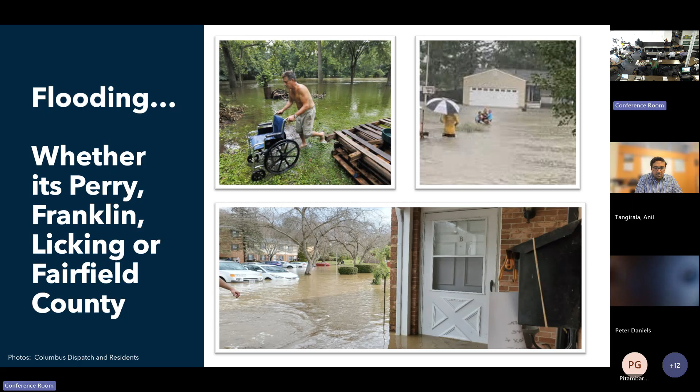So whether it's Perry County, Franklin County, Licking County, Fairfield County, we all have flooding concerns. And this is just some pictures. The top left is actually Granville. And this flood event happened down here on State Route 79 in Licking County. It was a pretty significant event, but this type of flooding seems to be becoming more common.

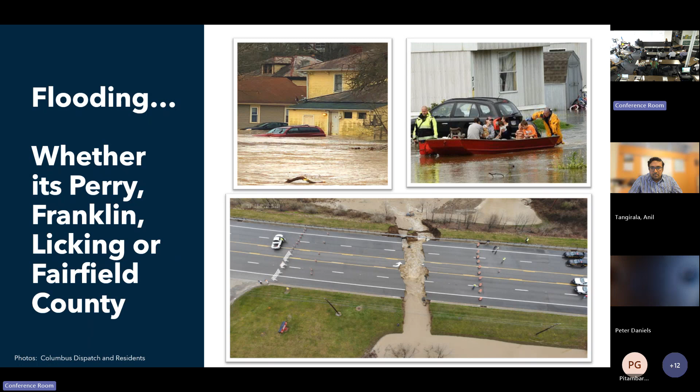I have always talked about the floodplains that we have in Ohio as being bathtubs, and I just never was able to describe it. So I said, I'm going to draw a picture of it just to get the point across. And what I mean by that is we don't have rapid moving water when we do flood. It usually fills in, and then if we have filled in the floodplain, that water goes elsewhere. So this is the intent of this graphic, to show that flat floodplains maybe don't drain as fast. And we have that issue here in the state of Ohio, in most of our counties, especially in central Ohio.

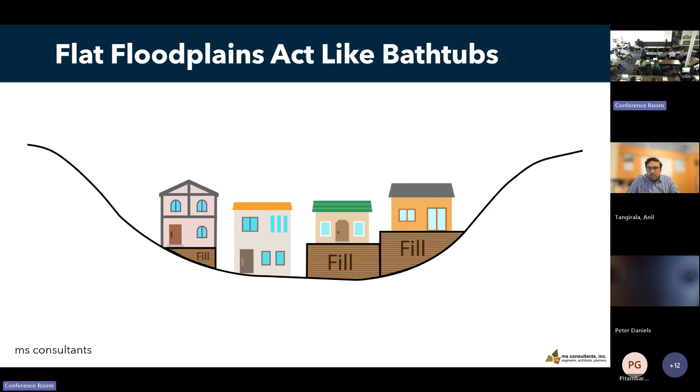One of the other things that really was telling to me is, we always talk about the 100-year event, the 100-year floodplain. That's the statistical analysis that we use when we say, boy, we had a pretty significant event. But this is pretty significant information. We have had four 1,000-year events in the last decade. Four in the state of Ohio. So that is telling to me that we are having microbursts and other things going on with our climate and our environment. And how do we address that?

Because the NFIP that we currently have was really used, and to this day is still used, for insurance. If you live in a special flood hazard area, that's what that NFIP map and those NFIP regulations are for. It did nothing to look at the 500-year event, the 1,000-year event. All these events are becoming more and more dramatic.

So the benefits to upgrading your standards: most communities in central Ohio, and I did an analysis through ChatGPT, have minimum standards and maybe some additional advanced standards. And why I am talking about the standards is because it's the low-hanging fruit of trying to provide resiliency for our watersheds. It's an easy way to do it. It helps to protect what's currently there and also future development. One of the things I also like to say is, I am not anti-development. I'm pro-development, but let's do it in a resilient, responsible way. That's really the end all be all.

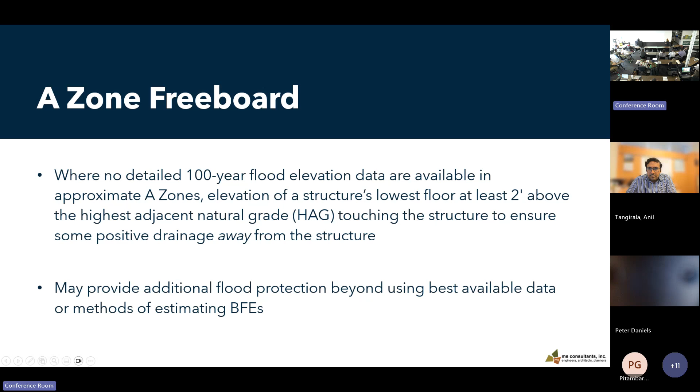Not working again. Battery. Try. Hit the next slide, please. The screen first. It was going so well.

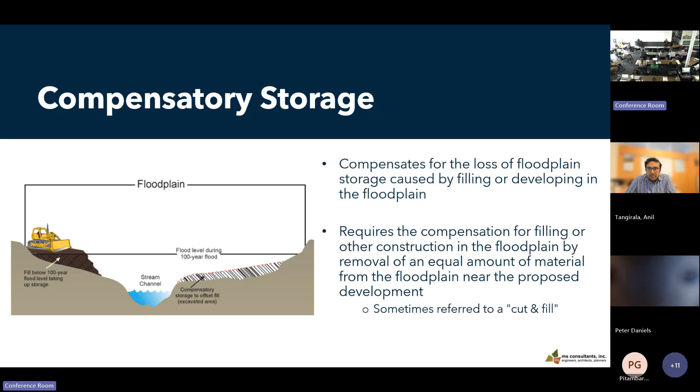It requires you to do all kinds of things, but what is compensatory storage not? And I finally made a graphic to show, I'm a big fan of these graphics here. Probably not proper terminology or English, but what is it not? It is not putting compensatory storage below the high water mark. That's basically the melon baller approach, and I don't understand why development thinks that that is compensatory storage. Just think about it in your mind. When that floodplain fills up, is that helping at all to compensate for the loss of you filling in the floodplain?

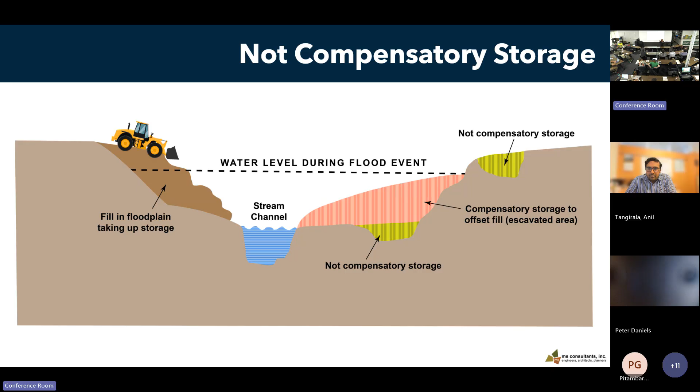The other thing compensatory storage is not, is outside of the 100-year floodplain. If there's no hydraulic connection, it is not compensatory storage. I feel like this needs to be plastered when people say, oh, we'll just go ahead and do compensatory storage. I'm like, okay, this is what it's not. So don't submit your plans and say this is what you want to do. So I'm glad that we finally were able to create this graphic.

Freeboard. This is a very common advanced standard that a lot of communities adopt because it's easy to do. It's basically a safety factor. The irony is when we're having these 1,000-year events, if you're in a 100-year floodplain, chances are you're still going to get flooded. But freeboard does help. It compensates for unknown factors that could contribute to flood heights. And it really seems to be the simplest advanced standard that you can adopt.

And I got some interesting pictures later to explain, because a lot of people have this vision that it's going to look like a house on the East Coast that's on stilts. And that is not what I'm talking about. So I finally took some real pictures to say, this is freeboard. It's not 10 feet in the air, waving in the wind, and you're having wave action issues from the Atlantic Ocean.

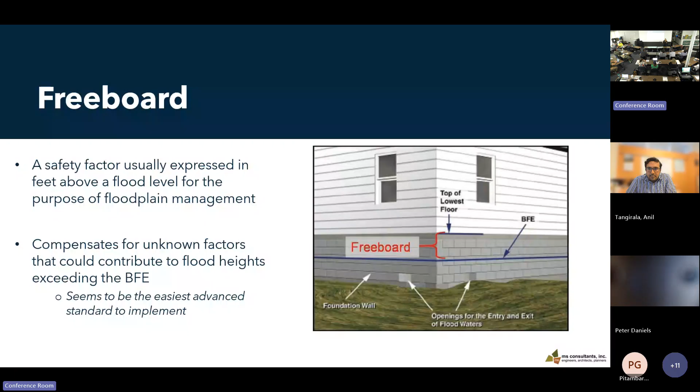Setbacks, this is great. And actually a big nod to the Chagrin River Watershed Partners. If you ever want to go to a website and see a great location for all kinds of different advanced standards, the Chagrin River Watershed Partners have done it. This is my favorite one though, because it provides a limited use or development setback along a water course. So yes, they have flood regulations, but they're also saying, listen, that's not enough. We want to have the setback consideration, because what do we know about streams and rivers? They move, they change. And so that setback helps to guarantee that you're a certain distance away from the center of that stream or that living waterway.

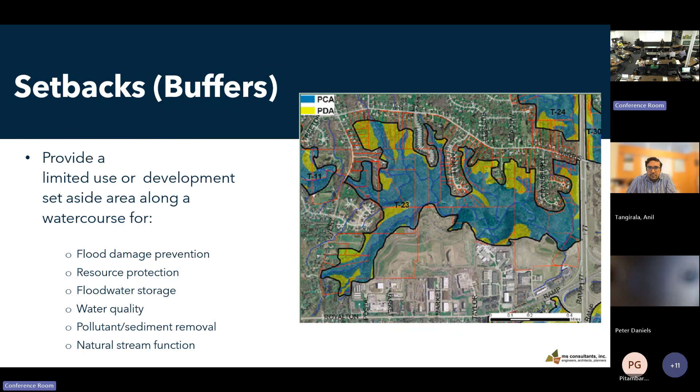Use restrictions. Restricting or prohibiting use of floodplain, which is dangerous to health, safety, property. This kind of goes in line with the no fill, and I'm going to talk a little bit more about that in detail. This is my arch nemesis. I do not comprehend why people want to fill in the floodplain. It doesn't make sense to me. It never has. I'm usually deer in the headlights when a person says this is their idea, that it's going to make sense.

First of all, if you fill in the floodplain in your residential structure, you're basically creating an island. So great, you're in a house and now your house is protected, but how are you going to get out? How are emergency vehicles going to protect you or come for you? So I wish this wasn't even something that I have to talk about, but I do, because one of the most common things that we do in our floodplains is we fill it. And then the developers walk away, and then everyone is stuck with the fill situation.

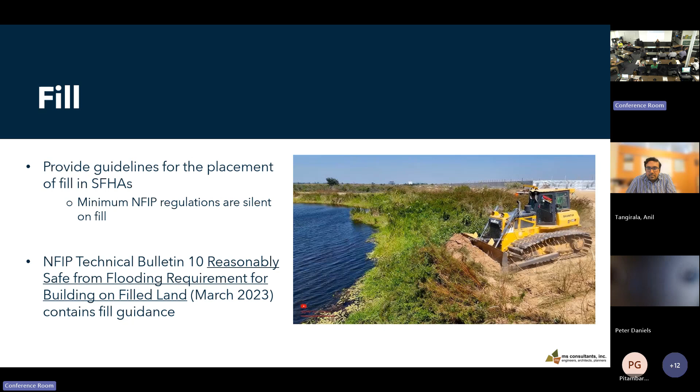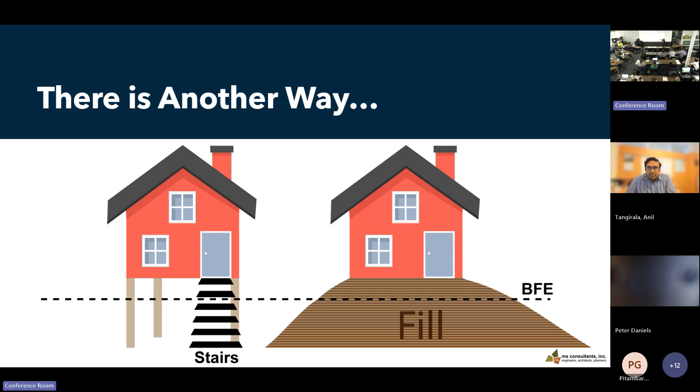So the NFIP regulations don't address fill. They say be above the BFE, be above the base flood elevation, however you do it, whether it's fill or whatever. But this is the easiest route for developers and anyone who wants to fill in the floodplain. So there is another way. Yes, there is. And this is a terrible graphic, but at least it gets the point across, and I have some real pictures, but this is what we traditionally do on structured fill. And then this is what I'm proposing, but not that high. It's terrible, I know, but this is where I'm going with this.

And I've worked with a structural engineer to try to get some numbers too, because that's the other thing. Well, we just can't do it. Too expensive, too much more expensive. And so looking at structured fill versus elevation, it's really, at this stage of the game, almost a wash.

Make sure your clickers work. Okay, so one of the places that we work is over in Fairfield County, near Buckeye Lake. Popular place for recreation and boating and flooding. A lot of floodplain around Buckeye Lake. It used to be called Pigeon Roost Swamp. It was famous because it held a lot of water. So it seems to be the place du jour where people want to go build new houses. And so one of the things that we're dealing with is this low-lying swampy floodplain.

When you put in fill, where does that water go? It moves to another location within the floodplain. And people who've been there for 20 or 30 years are like, now I'm flooded. I've never flooded before. What's going on? Well, the watershed has changed because new fill has been placed. So we went through this exercise with them to explain to them and the development community, you can do it. There's another way. And in fact, there was an example that just went in the prior year. And so we showed this to them.

And this is an example of an elevated home in North Walnut Township, built in a 100-year floodplain. And they use something called Perma-Columns. That's kind of like Kleenex, right? That's just a brand of it. But basically, this elevates the structure and you can't even tell that it's an elevated structure. It's protected. The only thing this resident has to do now is make sure their car is out of the way when the flood comes.

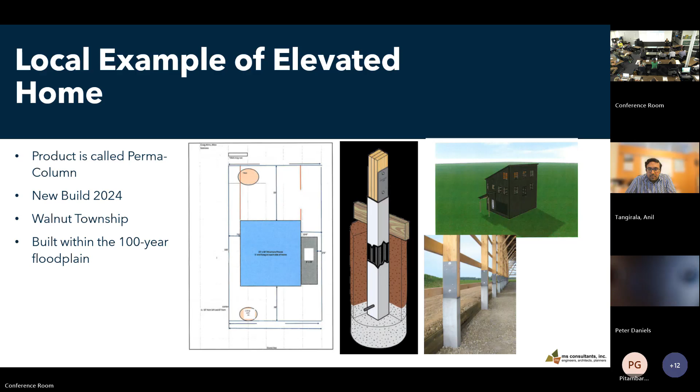Okay, here we go. This is the Central Ohio comparison of flood regulations. So, as I said, I used AI and did a little bit of analysis because one of the things I keep on hearing is, oh, Central Ohio has such strict regulations when it comes to the NFIP, and it's hard to develop here, and that's not the case.

I mean, we may have some communities whose processes need to be fixed, maybe a more structured way of looking at development. But at the end of the day, the NFIP, the regulations that we are using to protect our floodplains and our watersheds are not that advanced. But here's a comparison. Like I said, this is for everybody. I'm going to give this to everybody who wants it.

Licking County, Fairfield, Perry, and Franklin County. And as you can see the comparison, most of them have a freeboard, which I was really surprised about. I was like, oh, well, okay, even Perry County, which is probably one of the most rural of this comparison, has a freeboard requirement. And the only other thing that Licking County has that is a little bit more advanced, first of all, they're a CRS community currently.

CRS is Community Rating System, which is a FEMA program that allows you to do more advanced standards and gets people discounts on insurance. And they have a 30% discount across the board for residents in Licking County. That's a significant savings for folks who live in the floodplain. And the other thing that they have is, I don't know who made this decision, but it's pretty awesome. Back in the day, they're one of a couple communities in the entire nation that looked at advanced development within their floodplain. So they looked at future conditions as part of their mapping.

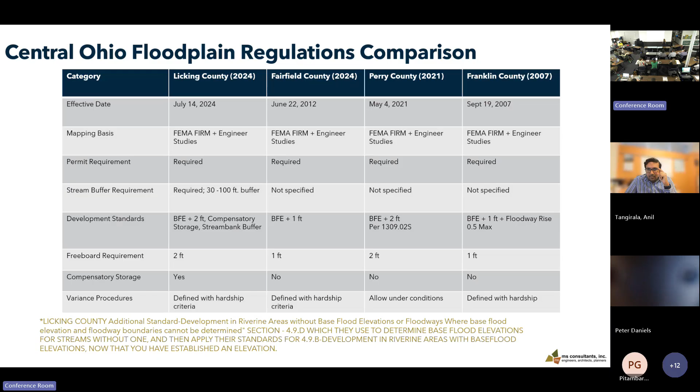Now, some would say, oh, that's so advanced and that makes it so difficult. Well, if you compare the existing floodplain to the future conditions, it's not that much different, but it just gives folks an opportunity to say stuff that's not correct. So I want to set the record straight here. So let me go into some examples of higher standards across the state of Ohio.

Anybody heard of Paulding County? Okay, well, it's an extremely rural community, and they have had this on the books for 20 years plus. And I love the simplicity of this regulation. They basically say, hey, our watershed, Flat Rock Creek, is in a floodplain. It's called Flat Rock Creek. And we know that it floods. We don't want any development that involves fill within our floodplain.

Simple enough. I always say it's the KISS method. Keep it simple, right? And at the end of the day, this is accepted and adopted, and they've been doing it for years and years and years. So if a rural community can do it, then so can our more urban communities as well.

Union County, they just adopted this, I believe in 2024: no fill is permitted in the floodplain or floodway, and no fill is permitted within 120 feet from the low water in zone A. So they've taken it upon themselves to look at what they want to regulate, and this is a new standard, and they've adopted that. Now, they also have the Big Darby, I believe, in Union County. Is that correct? Yeah. So they have some more advanced standards for their watersheds as well, but this was an example I wanted to show.

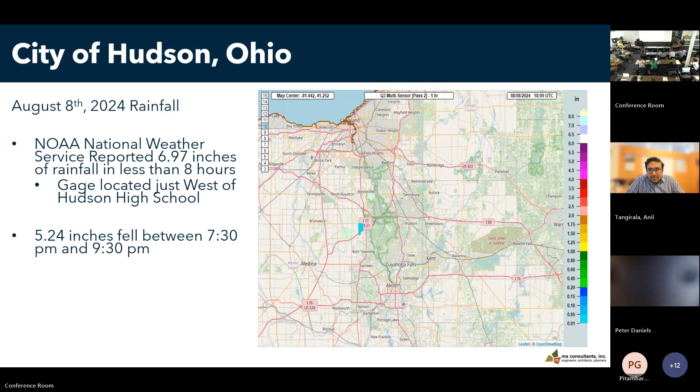Thank you. One of the first things the city engineer asked was, what storm is this? 5.24 inches in 2 hours. As engineers, we all use NOAA Atlas 14, which is basically a point precipitation frequency server. This is our go-to table for understanding what recurrence interval or design storm this is. When we looked at this table for a 2-hour event with 5.24 inches of rain, we were literally off the charts. We just didn't have a number for this storm. We could probably extrapolate it beyond the 1,000-year, but this was an event that Hudson could have never designed to.

But the point that came across was that we're seeing more and more of these events. They've seen some in the past too, but it's become more common, and so they really wanted to understand this. So what we did, if you go to the next slide, is we tried to extrapolate it, using frequency analyses and statistical analysis to understand, if we have to put a number to this storm, where would it be? We tried to fit a curve. As engineers, we love this kind of stuff. So we came up with an estimated storm, and the analysis told us it was definitely off the charts, somewhere between the 500 and 2,000-year.

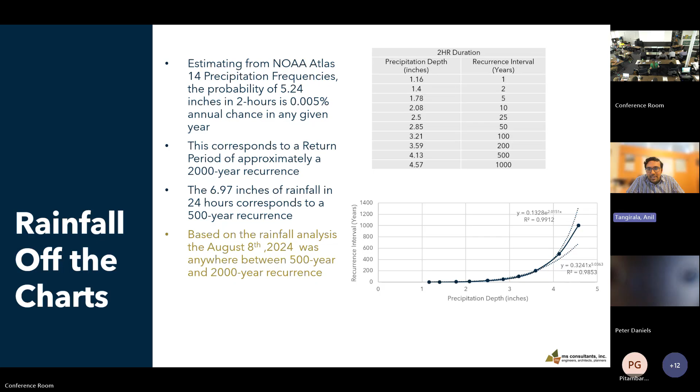One of the questions we all get is, what is a 100-year flood? There's this misnomer that a 100-year flood is something that occurs once in 100 years. Well, that's not true, right? There is a statistical probability for every storm. What we call a 100-year storm can occur almost every year; there's a 1% chance of that happening every year. Kari showed a table previously that showed several communities in Ohio had 1,000-year rainfall events.

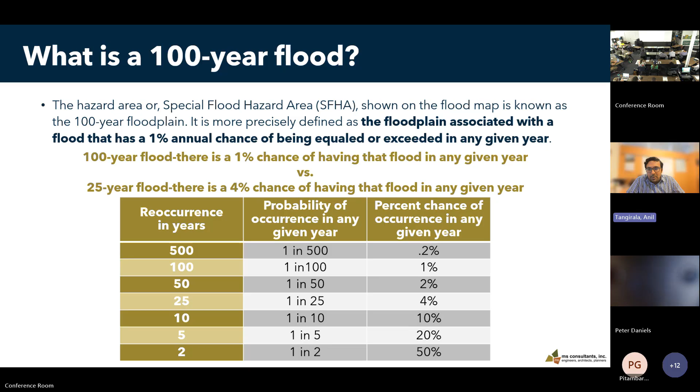For perspective, the Army Corps of Engineers actually calls this AEP, which is annual exceedance probability. It's a different terminology than just design storm. The point they're trying to emphasize is that in a given year, there's a percent chance for any of these recurrent storms to occur. Obviously, the 2, 5, and 10-year have higher recurrence compared to the other ones. Next slide, please. Thank you.

So, one of the things that with Hudson we were trying to figure out is how much more frequent are these smaller design storms. So we actually did a comprehensive rainfall analysis. We looked at some of the gauges. We actually used AI, to be honest with you, and used some of the coding to basically understand how much percent increase we are seeing in terms of these smaller events that would benefit from these advanced regulations.

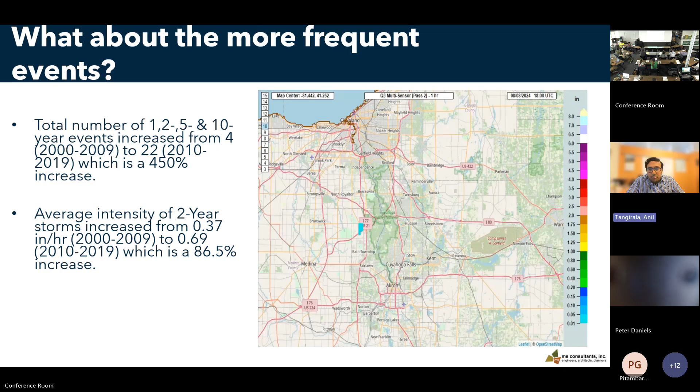And as you can see, for some of the smaller events, there's a 450% increase in how many more events they're having in the last decade even. So it was pretty eye-opening for the city management to really go back and consider what their framework should be going forward. Next slide, please.

I touched a little bit upon Atlas 14, but we all know Atlas 15 has been in the talks, and we do have a pilot of that, I believe, in Montana that has been released. With Atlas 15, I'm not going to go into the detail, but there are several additional things NOAA is looking at, and there are updated numbers that are supposed to be published in 2026. Who knows what that schedule is going to be? But one thing is sure: all of us are going to be seeing some elevated numbers in here.

Hudson obviously realized that Atlas 15 was coming. They had a choice about waiting for it. The other choice was there are other things we can do in terms of regulation before we wait for this. So that's what they chose, and they directed us to go forward with coming up with those ideas for advanced regulations. Next slide. And what's the difference between Atlas 14 and 15?

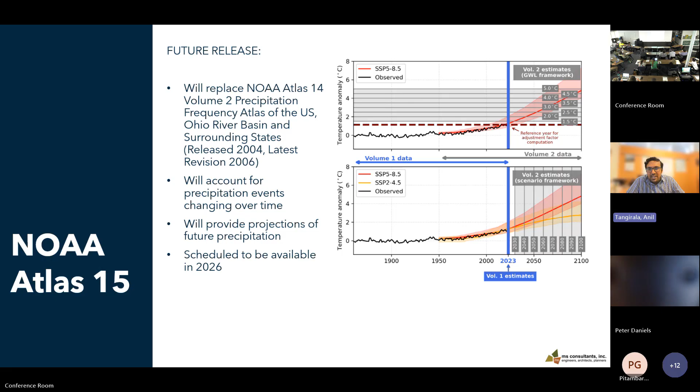Yeah, so Atlas 15 not only looks at historical rainfall, but also looks at climate change projections based on future rainfall estimates and how it fits into Atlas 14. As you can see, there's some of that terminology with SSP 5. Rainfall estimates are linked to the heat index and some of the other indices they look at in climate change models. All of those are considered in this new Atlas 15 estimate. So it's looking not only at historical, but also at future projections.

So one of the first things as part of developing the advanced regulations framework was to understand what cities around are doing in terms of advanced regulations. Kari touched on a few of these, but we really went in depth and tried to make sense of what stormwater design criteria we currently have. That varies anywhere from a 2-year event all the way to a 25- or 50-year event. There are also detention requirements. Many of us follow what's called the critical storm method for detention design, and that varies as well. Communities have their own detention requirements, and critical detention requirements vary as well.

Some of the communities actually promote more infiltration and evapotranspiration, and those are written in the regulations for developers to follow, and others are more detention focused. Some have a stream corridor protection zone. In fact, on this table, we notice everybody has that, which is great. Kari touched on that previously with riparian setback and stream corridor protection zone. It's a great tool to have. Compensatory storage, yeah, that's a big one. Some of the Central Ohio communities have had compensatory storage. Many of the Northeast communities currently don't have it, but are definitely considering it.

And then regional stormwater management. This is one of those tools where we're looking at stormwater at a regional scale, probably at a HUC 12 or HUC 14 level, and trying to understand how we can solve some of the flooding problems. So this gave us an idea of what's happening with various communities in terms of regulations. You can see that it's pretty varied across the board.

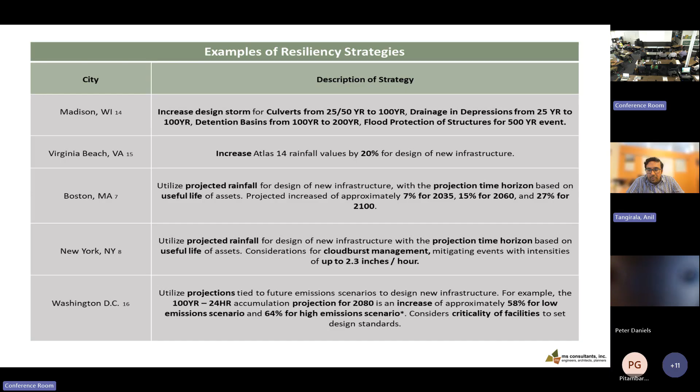Yeah. Anil, didn't Buckeye Lake have a cloudburst event this summer? Yeah, they did. Was it in July or August? I can't remember, but yeah, it was pretty bad. Columbus didn't receive any rainfall that day, but they had, I believe, 4 inches in an hour, 5 inches in an hour. 5 inches an hour, just over a localized area, enough to put a lot of strain on their system, for sure.

So when we looked at this, obviously we looked at Atlas 14, any of these rainfall events, and it comes with a confidence interval, right? A lower 90% confidence interval and an upper 90% confidence interval. So what you see with that curve there is a band where you can have 2.5 inches to 5.5 inches. No meteorologist is perfect, and some of the estimates are wrong. But what we've been following with Atlas 14 is the middle graph right there that shows the actual rainfall estimate for design.

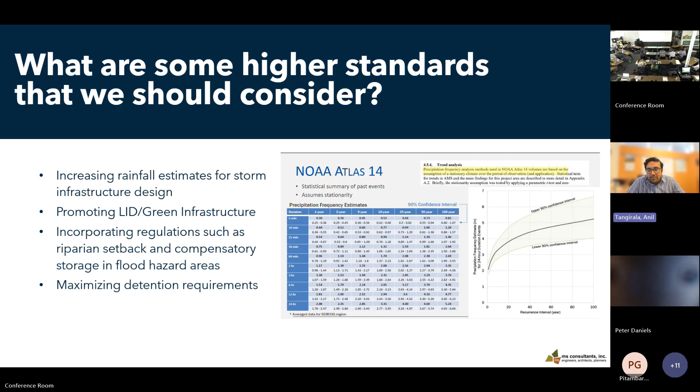What Hudson was thinking is, in lieu of having Atlas 15 numbers, how about we go to the upper 90% confidence interval and use that. They compared that upper 90% confidence interval to what other cities have been doing, and other cities have usually been in that 20 to 25% additional rainfall, which really compares to that upper 90% confidence interval. So that's what they were intending to do and trying to see if they can incorporate that as part of regulations. Next slide, please.

One of the challenges, and I think this is what everybody is worried about, is there is a cost of upgrading standards, right? We look at a standard upgrade like that and go, oh my God, that's going to increase construction costs. It's not feasible anymore. But this is something that MS really helped Hudson with: we did a study to understand what that cost difference looks like. Are we talking a little more detention to hold back, for example, a 25-year post to a 2-year pre, or a 100-year post to a 10-year, or how much more is that?

And so we actually did some modeling at a sub-watershed level to understand how much more detention. And surprisingly, it was not all that much. Sometimes it takes that additional step for detention. This was very encouraging to see that an additional 5% detention over a sub-watershed can yield much more sustainable storage in the watershed to protect it from flooding and erosion and all those things we worry about. So that's something that's important to analyze. It cannot be one size fits all. You have to analyze it for your community and see if it makes sense. Next slide, please.

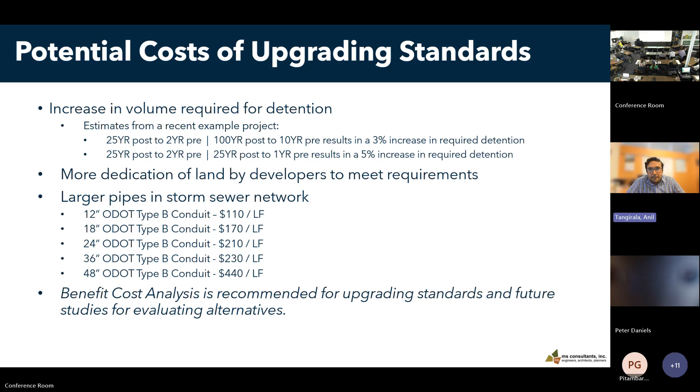So in addition to obviously looking at higher standards, we also compiled what other cities are doing. Obviously we have more adaptive controls that cities are using now, and adaptive controls have been around. It's not prominent yet in Ohio, but a lot of cities around the country are currently using what's called a CMAC, a continuous monitoring adaptive control, which basically gives us the ability to take a look at some of these projections and adjust the outlet structure of whether it's green infrastructure or detention basins to maximize the storage level, or use more of a master plan of detention areas in a watershed to help with flood mitigation.

In addition, obviously, there's a big talk about level of service, increasing level of service. And I think there have been studies that CMAC actually can help increase that level of service for storm infrastructure. In addition to that, we also recommended looking at a flood warning system. I know Licking County has developed something like that for more critical structures that flood. For example, I-70, which floods pretty often. They actually developed a flood warning system in cooperation with USGS and the National Weather Service. So something like that would be very beneficial.

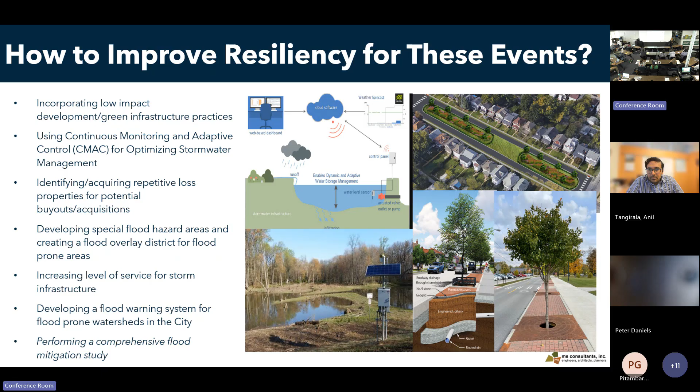So I'm trying to get Cleveland to do something like this. They have so much asphalt and huge sidewalks. I'm like, what are you guys doing? The sidewalks are double the size of normal sidewalks. I'm like, you could put all kinds of stuff in here to capture stormwater. Okay, go ahead. Sorry, Anil.

Oh, you're good. So I think ultimately after we went through this process, it was very beneficial for the city engineer and the city manager as well. Ultimately we presented all this in a regulations update report, and earlier this year, this ordinance was passed. It included some things that no community in Ohio currently has, so they're very proud of that, which includes rainfall estimates from Atlas 14. They've added 20% more to that rainfall to get to the 95% confidence limits for the stormwater infrastructure designs that have been adopted. They've added additional detention beyond what they were doing for a 25-year post, 2-year pre. They've also added a 100-year post, 10-year pre, which is in line with other cities that have advanced regulations as well.

And not to get into the engineering details, but in some cases, developers have been gaming the system with the pre-development curve number value, and the city engineer was very critical about that, and basically included a regulation not to have a curve number greater than 75, which was important for them, so that they're not providing less estimation of surface water retention. So that was another item that was tackled as well.

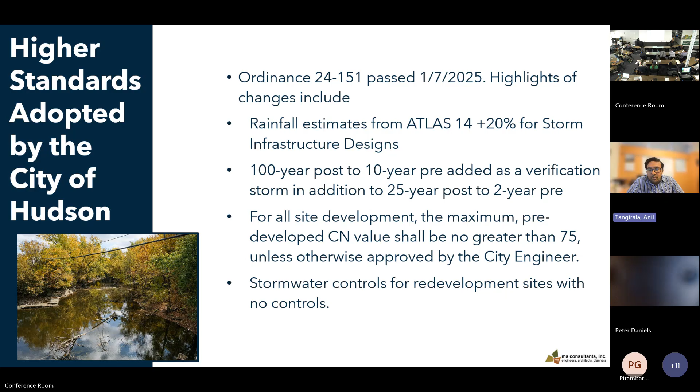In addition, there were several neighborhoods in Hudson that basically had no detention controls previously. And now they've incorporated some legislation to be able to go back and do some retrofits, stormwater controls for these redevelopment sites. That's going to help the entire watershed. So what led to this is basically a master plan of sorts that MS is currently working on for a couple of their watersheds, Tinkers Creek and the Tuscarawas watershed. We're looking at advanced flood mitigation strategies to incorporate some of these higher standards and come up with more regional solutions for their watersheds. With that, I'm gonna turn it back to you, Kari.

Back to me. Hudson is a very recent example; they started this earlier this year. I think what Hudson was able to show us, and hopefully show all of us here that are listening, is that it's not just one thing.

You don't just do a study. You do a flood study, you say, yep, you got flooding, and here's some mitigation alternatives to consider. They went the extra step and they did some of these things on their own. They said, we need some advanced considerations, some advanced standards. So all of that coupled together is going to give them more resilient watersheds.

They know they're going to have another flood. So let's make our community more resilient. And I applaud Hudson for going the extra step. So focusing on the future, what we didn't want to do was tell you all about how they do these advanced standards without giving you at least some guidance on how to do it. So the process for advancing standards for more sustainable development.

One of the first things that you need to do is determine what type of flooding do you have? What's the source? How are you affected? Are these the same risks in your region, i.e. do other communities have the same types of risks? Do you have alluvial, pluvial? There's all kinds of fancy terms out there. But at the end of the day, what is your biggest risk? Have you been susceptible to microbursts, or what is your flood risk?

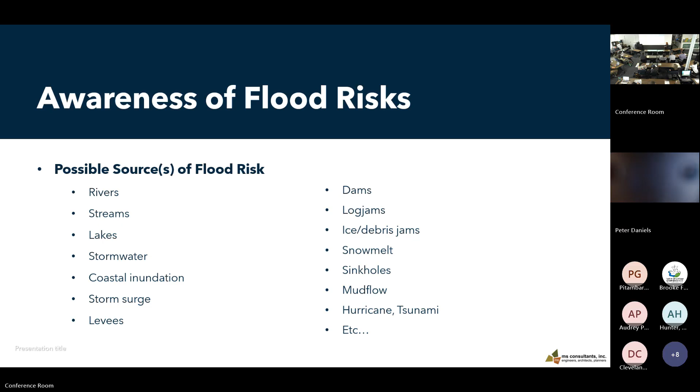Awareness of your flood risk. Does the risk extend beyond the special flood hazard area? I think a lot of communities are realizing that this is the case, that as I said, the NFIP is just an insurance document that they use to determine how much insurance you're going to pay. If you're outside of the special flood hazard area, anybody can buy flood insurance, even if you're outside of the NFIP map. So, do you have additional studies or data to show?

This is something that I also want to hit home. As we know, FEMA is kind of up in the air on where things are going to go with that agency. And even on a good day, it took a long time to get updates done to our maps. So can you use best available data? If you have a new flood study that's been done in your community and it shows a different floodplain and it's been evaluated and QAQC'd and maybe ODNR, the flood division, has looked at it and said yes, can you use that for regulatory purposes? The answer is 100% yes, you can use it for regulatory purposes. So I want to make sure that is crystal clear. You can use advanced information for regulatory purposes.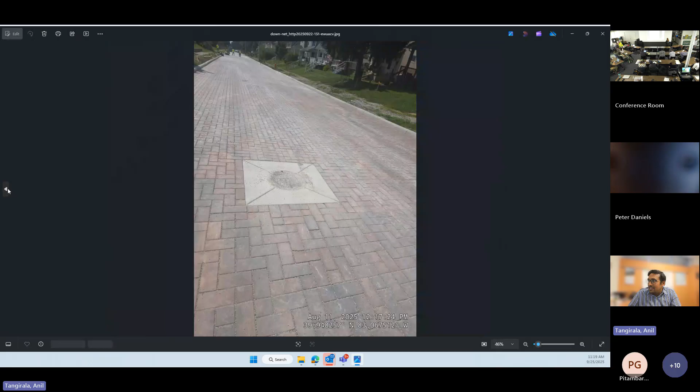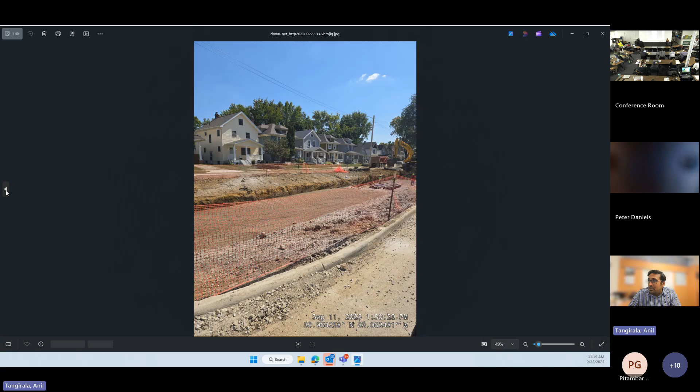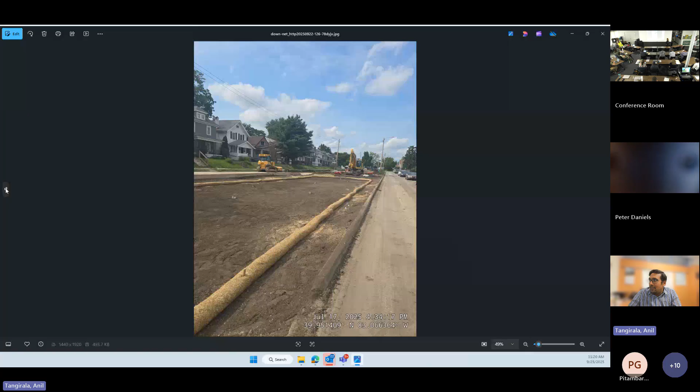So anyway, some of the pictures of the bioretention cells here in this neighborhood. This was that inlet that we were doing, and this is fresh off the press. The contractor just sent it to me yesterday. This is that permeable pavement, interlocking pavers. It's on Richardson Avenue and Wayne Avenue in the Hilltop area here in Columbus, and we actually had a big discussion about this. This is that boulevard area, right? This used to be a boulevard. Right now, everything is being pitched towards the boulevard, and there's going to be a giant bioretention cell with a lot of storage here as well. It's another picture of permeable.

And as Anil said, we were fixing things with the bioretention, but we weren't completely fixing the flooding. It would be a travesty to put in all this green infrastructure and there still be flooding. People go, well, I thought that was going to fix that. So as Anil mentioned, they went ahead and upsized the pipes underneath to provide that storage. So visually people see the green infrastructure, but it's an integrated system. And this was, I think, the first Blueprint project. There are several, but this was the first one that said, we can integrate our systems. We can upsize. It won't cost that much more. Let's go ahead and provide that storage. So this is an innovation. I feel that we're learning from how we're putting in this green infrastructure.

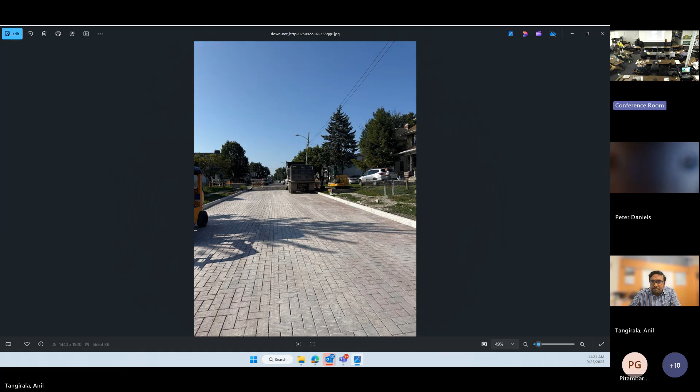Go ahead, Anil, if you have anything else. Absolutely. I think that must be all. Like I said, those projects are in progress.

Pavers look nice. I mean, a lot of these communities had brick streets and then they paved over them because that was the way that we did it back in the day. So to bring the visual back, and it's just a nice system that captures that stormwater, it's great.

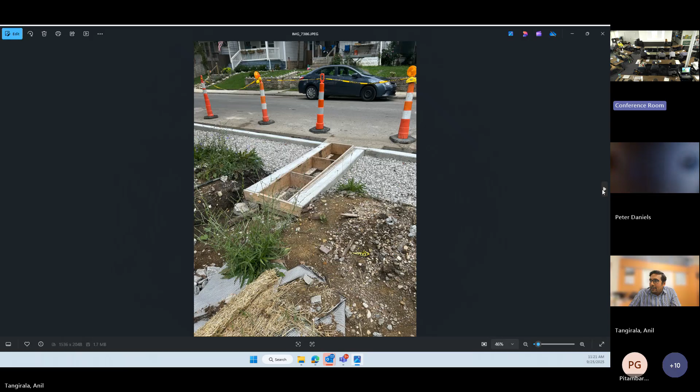And the cost has gone down. Permeable pavements was super expensive, but now we got more vendors in there. So now it's just engineering 101. More people come into the system and the cost goes down. Agreed. So anyway, wanted to share some of the examples, pretty recent examples here in Columbus too. Any more questions?